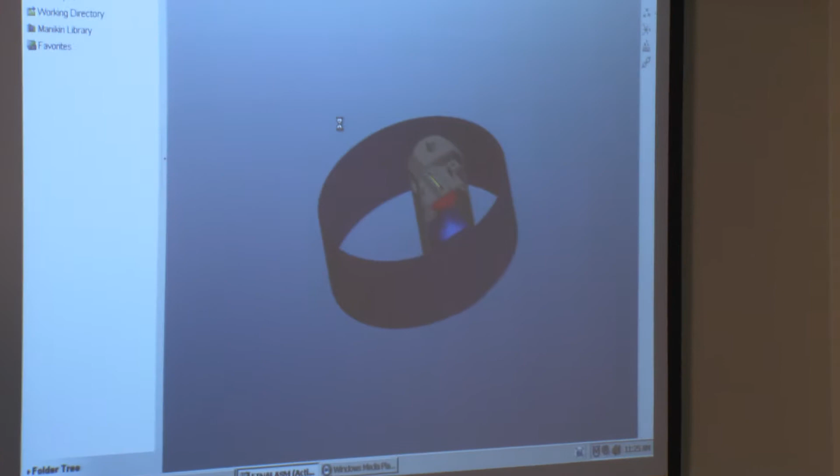Well, I can talk about the physical model while we're waiting. A couple of problems we had, just like all the other groups, was tolerances. We weren't quite sure on those, so we did have to do a lot of sanding to fit the legs, the arms, and all the connecting rods and stuff for the mechanism.

We decided to mount the motion sensor right on the belly here. I don't know if you guys can see that. So we decided to cut a hole in the material. We had to buy the fur, obviously, to make it look more realistic.

Another problem we had was the cymbals, because in our model they have to be exactly perfect for them to clap right. So we wanted to have some leeway on that. So we decided to use Velcro tape, which allows some compression and movement.

What else? Another problem we had was when we modeled the motor. It was hard to get the dimensions because the bottom was curved. So to get that exact curvature, we had to leave some leeway, and we planned on gluing it at first, but the curvature was too much, so we had to use Velcro tape for that. So the motor isn't held in there exactly how we planned.

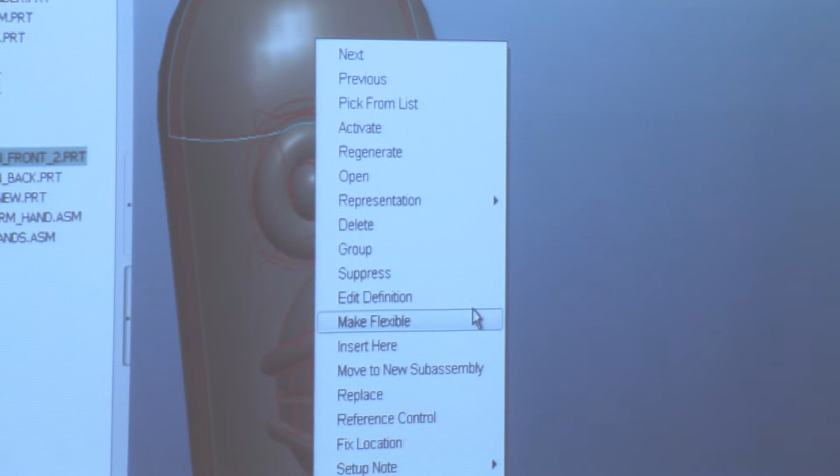Some of our surface models, like other groups have said, the complexity of something organic, like the face of the monkey: if you just do generic shapes, it won't look very realistic. So on this face, as you can see here, it's kind of a cylinder, but you want a flat area for the eyes and mouth. But if you have it completely flat, it looks very structured and it's too sharp.

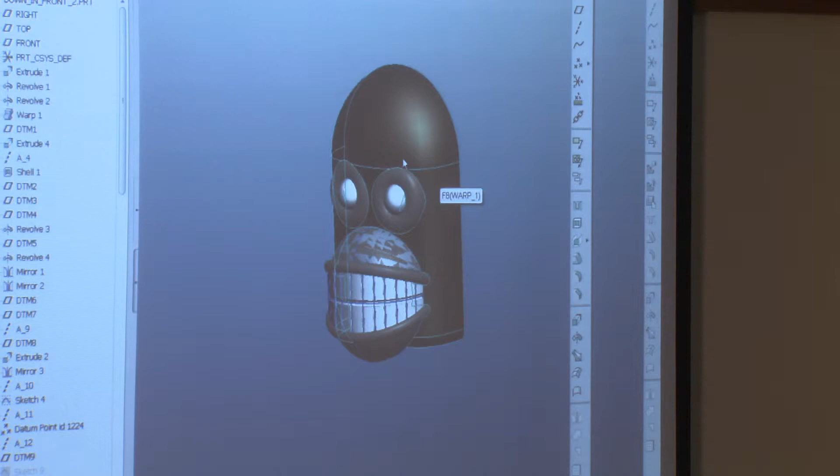So we had to use a warp to warp the face down on the side, which ended up being pretty challenging to work around because the warp isn't symmetric. So you end up with a lot of weird interacting surfaces.

We used mostly sweeps for the mouth and the lips, and then for the teeth and the eyes, we used projections from the back, and we projected surfaces up. For the eyes, we used a circular sweep, and then for the mouth, like I said, we did a projection of the teeth from the back, and then ran trenches down the teeth so it looks like the teeth from the original monkey.

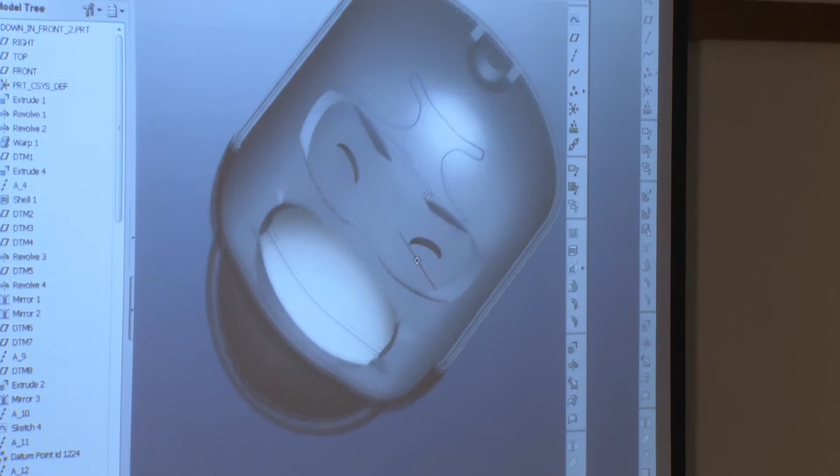It's got a lot of complexity to it. Also, we ended up cutting it out and hollowing it. As you can see, we're trying to save volume on the front, but it's challenging with those sweeps to hollow it out without making it too thin or making it cut into something that then won't blend properly.

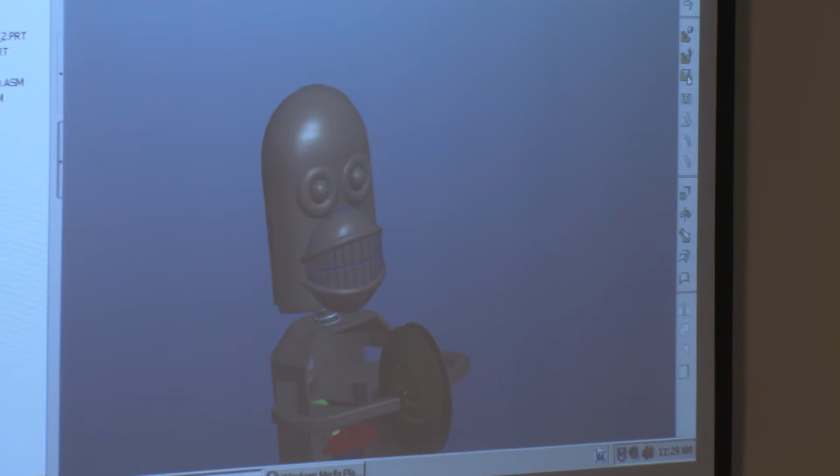The hands turned out to be surprisingly difficult. Each hand is an assembly with 6 parts in it: the palm and each finger. The palm is a variable section sweep, and the fingers are 3 rotations, or 2 in the case of the thumb.

Once we got one hand completed, we all had to learn a little bit about mirroring an entire assembly as opposed to just a part. What we had to do is save one file with 2 hands in it, and then go back and delete one hand, so we had one file with the right hand and one file with the left hand. So that was a learning experience.

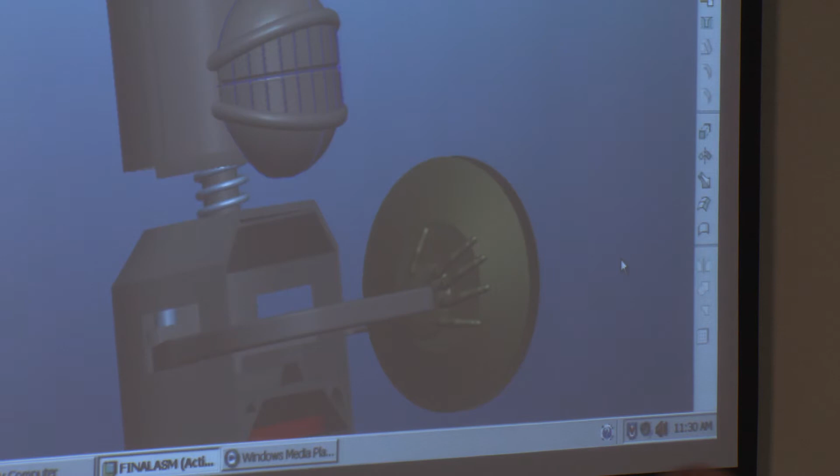So for our physical model, we'll try running it for you. Probably the biggest problem we ran into, after we got all our SLA parts sanded down to the right tolerances to fit, is the friction of the crank slider. The slider in the sliding slot, with the bending moment that the arms create on the pin, creates quite a lot of friction, and sometimes it gets jammed, but if we're lucky, it'll work.

Turn it up. Yeah, so right there, it's getting stuck. It was working last night. Sometimes it'll bog like that, and it'll still come together. I think one of the problems is where it's at right now. It's starting in that back position, so we'll try it from up here and see. Well, now it came unhooked. Now the pin came out maybe. So that was tough.